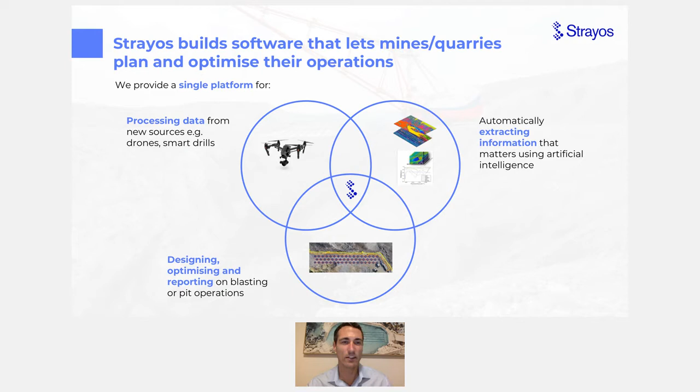And then once you have all of that information, we allow you to design, optimize, and report all from the same platform, either from the browser in the cloud or on your own device standalone. So, next slide. Where are we?

Strayos has been around since 2016, about 5 years ago, and we're already used across about 600 sites across 8 countries all around the world. So it's great that we have people here from all around the world. We have a very global footprint and a very global customer support presence as well. We have people in the US, Europe, Asia, and Australia.

So what does Strayos actually provide? More specifically, it's along each step of the mining value chain, AI tools that assist with that kind of design and optimization. So at the beginning, we have tools that can assist with mine planning and surveying, so building models, working out volumes for the different blocks, etc. We have geology analysis, which is really the big focus of today, is this auto detection of geological features.

In terms of drilling, we have measure while drilling integration. So you can basically receive and pull data directly to and from smart drills. We have blasting design and also prediction tools. So we allow you to actually do a drill pattern design, for example, on the model that you've created, and then predict what those blast outcomes are going to look like from that.

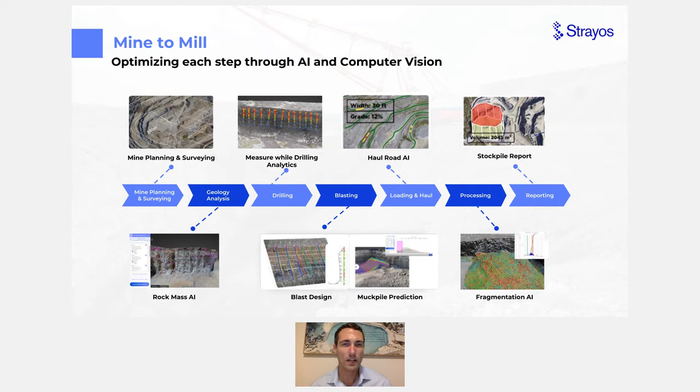Awesome. So I'll move on to an example workflow that you might see when you're using Strayos. So to make this a bit more real, what you might do as a user is fly a drone along a bench, capture a whole bunch of pictures. This could just be an off-the-shelf drone for $1,000 or whatever. You'll upload those pictures to our cloud platform, or we also have an offline version as well, because we know a lot of people operate in areas with low connectivity.

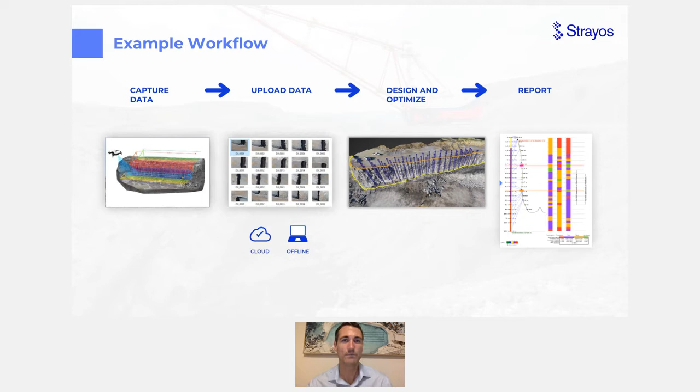We'll process everything on our end, and then basically just give it back to you to do the design and optimization with tools that we have built in, and then you print off the report. And in this case, the example is a burden report with some measure while drilling data in there to take back out in the field and use in your operations. So that is the quick Strayos overview.

I'm keen now to get everyone here involved. So I'm not the only one doing any work around here, and I'll open up the first poll just to see how many of you are using drones at the moment. So hopefully you can see this on your screen now. Yep, okay, I see some answers coming in. How often do you use drones for work? Yeah, wow, it's interesting. I can see it's a very split field. People either using drones all the time or never. We have a few more rarelies coming in now. Good to see. Okay, I think we've stabilized the numbers.

Okay, so it's interesting. It sounds like we have quite a few heavy drone users, and then some people who never use them. So that's going to be interesting going forward. I'll close the poll down now and then move on. So yeah, that's cool, because for those of you who don't use drones, you'll have a bit of information on the potential that they can provide, and those of you who do will have a bit of information on the best practices for using them. So hopefully we have something for everybody. So let's move on.

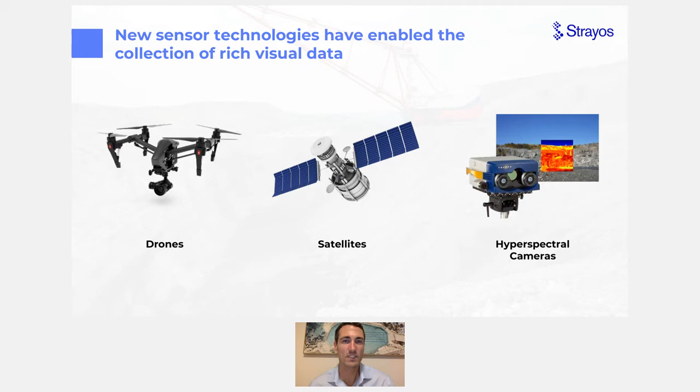So how do we get these new forms of data? Well, this is the kind of tip for best practice flight techniques. If you're using a drone, for example, and you're flying a bench, what we need people to do is basically get 70 to 80% overlap between the pictures.

Our technique is kind of fly across the top and then step back, tilt the camera to about 40 to 50 degrees in that second picture so you can actually see the face as well. Scan along the face there, and then do some scanning along the floor surface as well. And yeah, it's really critical to get that middle section right.

You really want to make sure that you get the oblique images, the ones where you've tilted the camera. You really want to make sure that you can get under any cracks or any overhangs in the face when you're flying, because if there's something that's not in the photo, then it's not going to be in the model.

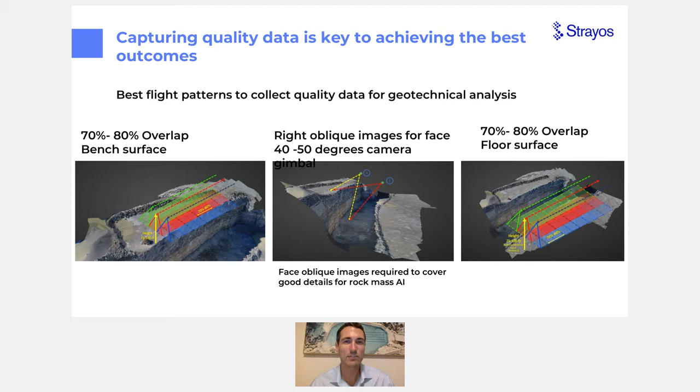So once you have this data, the really exciting thing is that now we have AI that can process it. So it's not just the old taking photos in the field and then drawing some lines on in Paint and handing it over to a blaster or a driller, or handing it over to geotech, for example. It's actually having this full 3D photo model that software can look over and automatically detect cracks in.

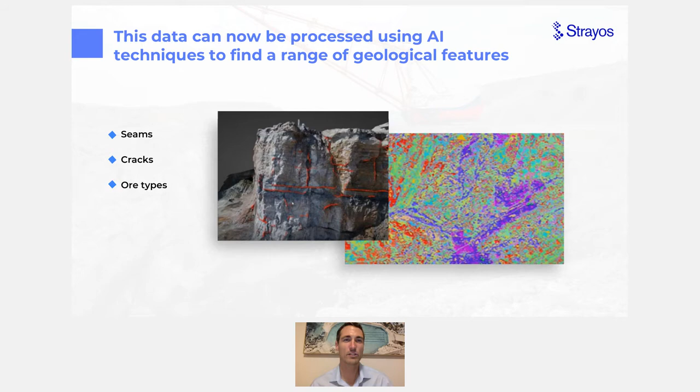The other thing is with hyperspectral imagery, it's also possible to basically see where different types of mineralization are, either in the face or in the muck pile. So there's a whole bunch of exciting new things we can do with this new data. And why is that even important? Because knowing where geological features are in blasting is definitely critical to designing a good blast.

Basically, I've got 3 use cases here that we're going to walk through. The first one is around maximizing coal recovery. So basically knowing where the seam is at a very accurate height, or depth rather, so that you can get your standoff right and avoid any coal loss.

Secondly, preventing fly rock. And so this is what I'm going to talk to in terms of quarries, but it still applies everywhere, is basically knowing the depth of where your cracks are, especially if they're large joint planes that are prone to gas escaping, face ejection, things like that, and being able to stem through those joint planes, especially on your front row holes.

And then finally is optimizing your milling performance. So basically being selective about where you throw different parts of the blast to try and separate good material from bad material, or ore zones of different types. Doing that in the blasting stage, and then also in the digging stage. So if you fly your muck pile, being able to see different ore zones, basically.

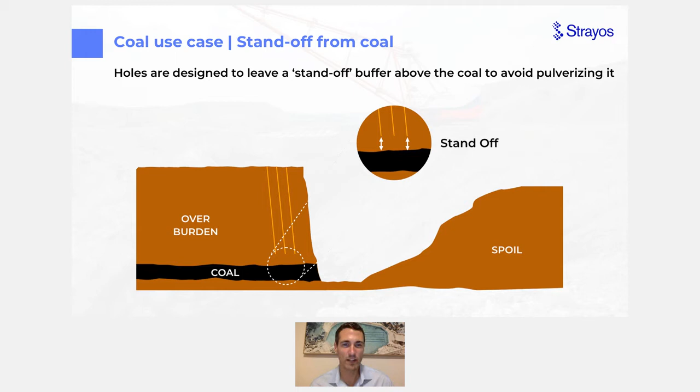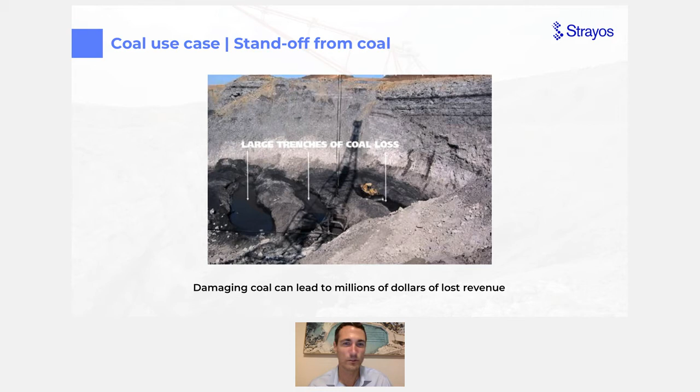And so the normal ways of dealing with this are you use touch coal holes. Touch coal data is probably the most common way, where basically you drill every 5th hole down to the coal to work out where the coal seam is.

The problem is, and this is a case that I've had a few times, so definitely keen to hear in the chat if anyone else has cases like this, where your touch coal holes don't give you an accurate picture of where the seam is. So you might have a seam that does something jagged like this. You have some big discontinuity, and if you create a surface purely from the touch coal holes, it would look like that green line there. And if you then design your drill holes to that depth, you'll end up being too close to the coal in the middle, and probably too far from the coal over on the right-hand side there.

And yeah, this is an issue that I've seen at quite a few sites. The solution is often people going out and trying to take photos in the face and then trying to match that up with where different holes are, but you still don't have an accurate view of the depths, and it's a very difficult place to be, and you end up having to do things like either drilling more touch coal holes and backfilling more, or gamma logging, and you get yourself into a lot of wasted time and effort.

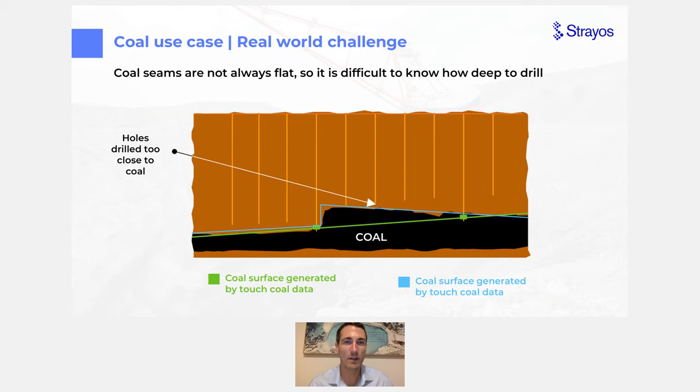And this is where I've detailed those things down. So your options at the moment are your regular touch coal strategy of just drilling every 5th hole to touch coal. But as you saw in that last picture, you might not get the discontinuities. Drilling every hole you could do, but then you would have to backfill every hole, which is not ideal. It can take a lot of time.

Gamma logging is very accurate. Again, you'd have to drill through every hole and backfill it. It's probably more useful for through seam applications. Manual photo comparisons, as I mentioned, you don't know the depth.

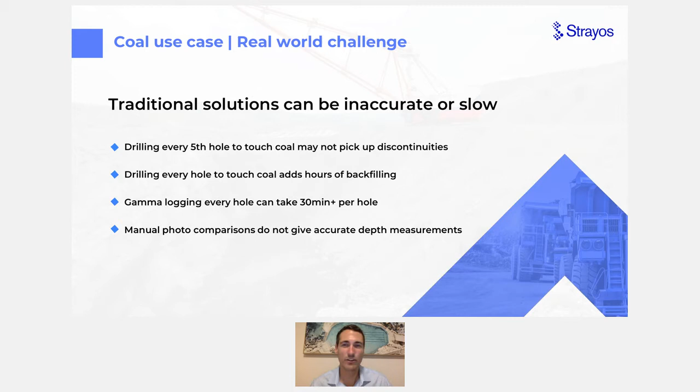So the solution is that now with AI, you can fly over the bench and capture the drone data. So basically get all those pictures, upload them into a platform to process that data. You then have a 3D photo model of the bench, also with all that geotechnical information highlighted already. And you can bring that into your blast design software, and then you can design the drill holes based on that seam depth. So you can basically project that seam depth back to your holes and design them.

Then when you actually go to drill the holes, once you've been drilling, you can add that touch coal data in to generate an even more accurate coal surface. And then you can use that to backfill the holes and make sure that all your holes are standing off coal.

Finally, the other bonus is that once you have that much more accurate seam surface in there, you have a baseline for measuring coal loss, because it's super important to avoid the coal loss, but you also need to be able to measure what you're doing. You need to know how much coal you are actually losing, because maybe you're losing it from another source, not just the lack of standoff. So it's very important to have an accurate view of the seam.

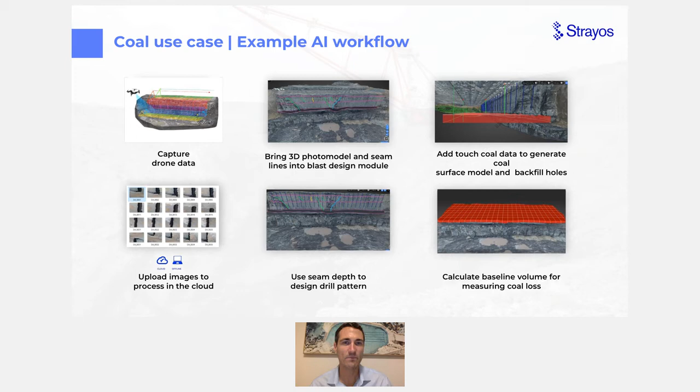Awesome. So I'll pause for a second. So that was the coal use case. The next thing that I'm going to talk about is the quarrying use case. And this is where probably half the people were joining from. So I'll spend a bit of time on it, and feel free to throw your questions into the questions area if you have any.

The main use case for quarries that I see is basically allowing you to stem through joints.

You have cases where you'll have a plane, especially on some sites. You'll know that there's a plane there that is just prone to ejection, and some sites will already know and have methods for trying to stem through that. And some sites, it might be more variable. You might miss things, and you might end up just having a site, hopefully further from houses and from anything else, where you just end up having a lot more ejection incidents and gas escape incidents.

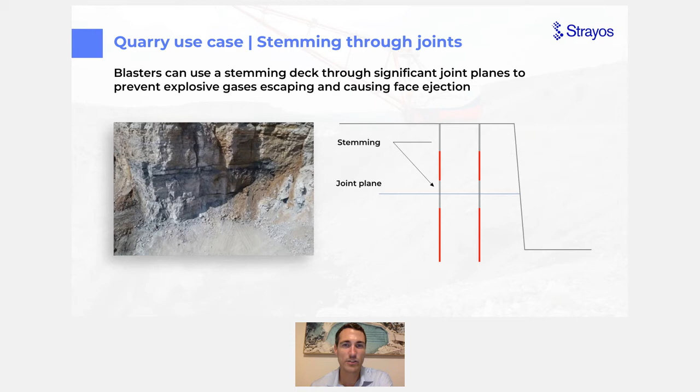And so the traditional methods, which everyone's probably aware of: one, you could use the burden pole, push it out over the face, measuring tape, have someone down below looking and saying, yep, this is where your plumb bob is at the crack, and then at the top you measure, here's my depth of that crack, bring that back to the hole, and then you know where you're at. That's one way of dealing with it. The issue with that is that it's a slow manual process. It takes multiple people, and you have to do it for every single hole.

You've also got people in potentially dangerous situations, standing too close to the crest or standing underneath the high wall. And lastly, it's still subjective. You're still relying on a person at the bottom to tell you when it's at the right height. So it's not a perfect solution. And with lasers on the right-hand side, if you are shooting in a seam with a 2D laser, you'd still need two people, someone at the top over the hole who's holding up the reflector, allowing you to calibrate how deep that crack is. Still a manual process with multiple people involved. It's an extra step on site. That's time that you could spend loading.

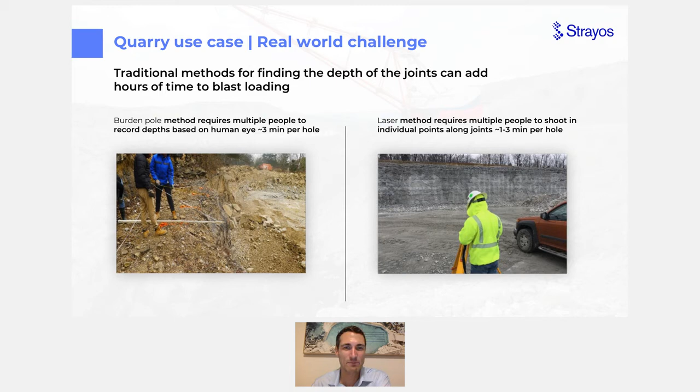Then it's time that you could spend laying out, designing your blast. Then the other option is 3D laser, shooting in the crack when you do your design. That's slightly faster, but you're still manually shooting it in. You have to know where it is. You have to be able to look through that sight and pick it up. If you have one crack that's very obvious, then it can work, but it's still subjective. And if you have multiple cracks, that can be more difficult. Also, it gets very difficult if you have to shoot around a corner. So that's what you can do with traditional methods, and why those can be challenging, time-consuming, and less safe in some circumstances.

So the workflow that you can now do using drones and AI is to fly your drone, capture all of the data, same as last time, upload it to be processed. You have your 3D model of the face. You'll immediately get this view of where all of those cracks are along the face, around any corners, and you'll be able to optionally, if you have a smart drill, import measure while drilling data on top of that.

What that will allow you to do is marry up your measure while drilling data with your crack detection data from the face, so that you can pick up key signatures in the measure while drilling data that give away when they're intersecting that crack. That can then allow you to not just know where that crack is on the face, but get a view of what that plane is doing throughout the body of your shot. So that's a really good one for creating a really holistic mapping of planes subsurface in your shots.

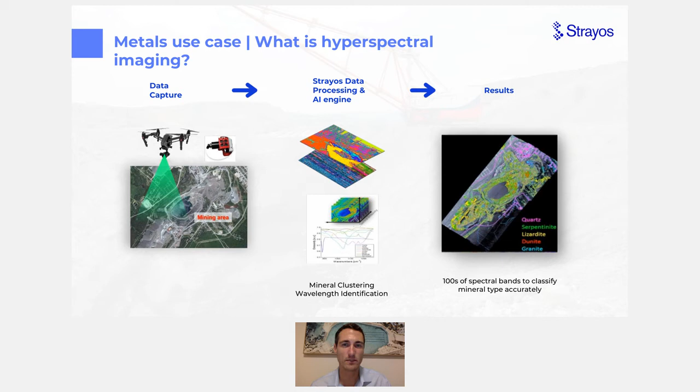So the use case that I'm going to introduce for metals is basically separating ore zones using timing in blasting. A key outcome that metals mines are often trying to achieve is to separate different types of ore. So either ore from waste, or an ore with a certain type of mineral from an ore with a different type of mineral. And that really facilitates a much more efficient milling process. So it offers the opportunity to really improve the throughput that you get, and reduce the amount of waste as well.

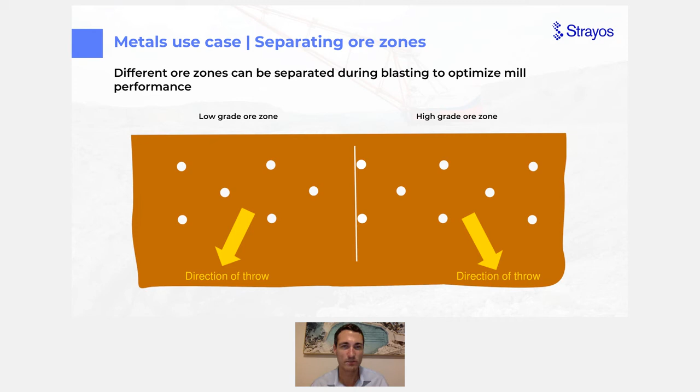And that's really the challenge of this: the way that it's worked out today, using assay holes, geologists doing some basic sampling and testing on the bench before you blast to work out where they find different grades of ore, and then interpolating between those points. You don't get a very high resolution picture. You just get a low resolution picture with interpolations between.

And those assumptions can be right, but they also might not be. You might have high grade only go right up to just past those top holes, and then suddenly it switches to low grade, but you won't know that.

Hyperspectral imagery is now, and this is the exciting front of new research, shown to be able to detect different ore grades in the bench. So that's using a camera. You could point it at the bench and actually detect, here is exactly where my high grade stops and here's where my low grade starts.

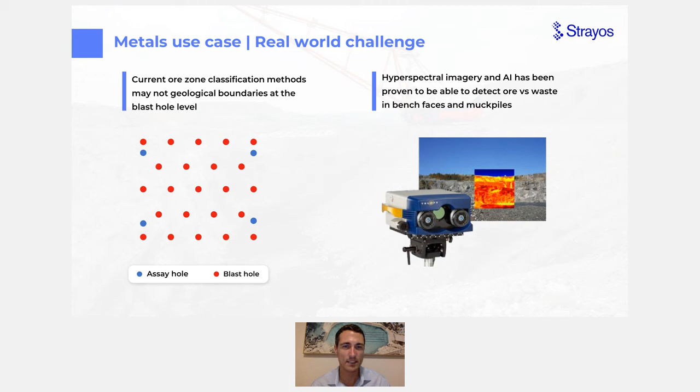So the example workflow for using this would be to still capture the data from those assay holes in the first place, because you need to calibrate that hyperspectral model. You'd still capture the 3D visual model and the hyperspectral model for the bench. You could bring all of that together, and then you'd have this very accurate, defined view of where your different ore zones are, and you could then use that to adjust your timing to pull different parts of the shot in different directions.

So that's how you can use this to really decrease your dilution, making sure that you're separating different types of ore from one another at the very beginning before they get mixed together.

The other application that you can use in metals or even in quarries is that you can detect pretty easily signatures for waste materials like clay in the muck pile. So after you've blasted, you could fly the drone with a hyperspectral camera over the muck pile. You could figure out this half of my muck pile is actually full of waste material and impurities, and tell the loader operator to put that into a different area to the rest of your ore, and that could really optimize how your plant processes all of that material.

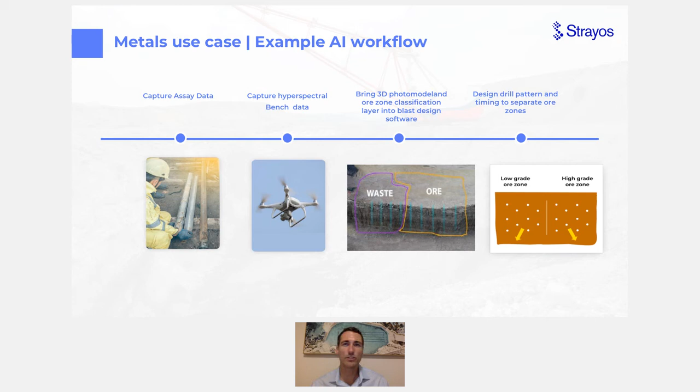Nice. So those are the use cases for today. I'm keen now to get everyone's feedback on which of these use cases they're most interested to learn more about. I know we had a lot of quarry people in here, but that doesn't mean you have to pick the fly rock one. If we produce more content, what should we angle it towards? Is it ensuring standoff, maximizing the recovery, preventing fly rock, hyperspectral in the bench before the blast, or hyperspectral in the muck pile to assist loading after the blast?

So really interesting results here. I can see we got, definitely, a lot of people that are interested in the fly rock side of things, but the strongest one is actually the hyperspectral use case for ore zones in bench, which is cool. So I'm not surprised. It's also the most recent one in everyone's memory, so maybe that's it.